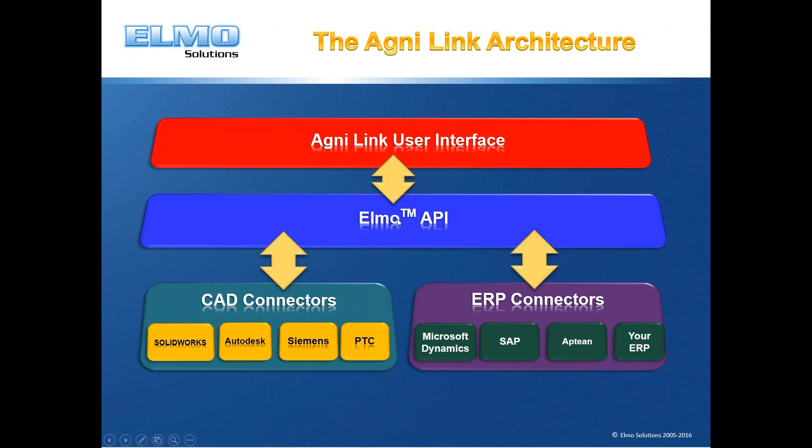So let's see how it works. For the sake of today's presentation, we're going to use SolidWorks as our CAD application and Dynamics NAV as our ERP application.

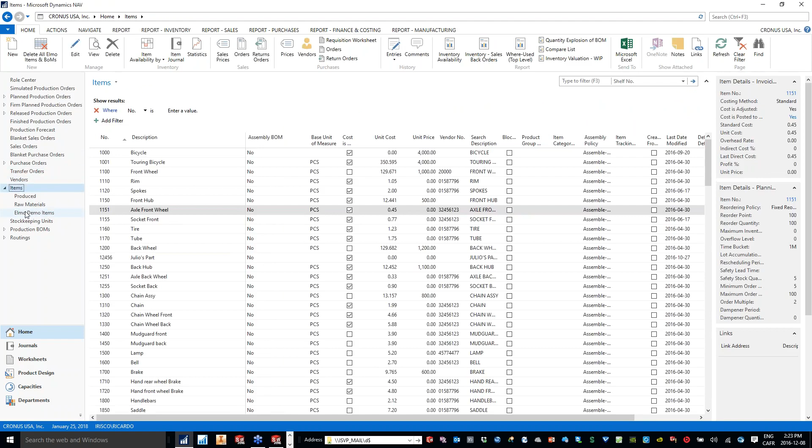Notice that the ERP database here is totally void of any of my own items. This is actually the good old Cronus database for those familiar with NAV. So there are some items in there; however, there are no items that have been created or processed by the integration.

So what we're going to do first and foremost is complete our integration and automatically populate the items in the bills of materials with whatever has been found in the engineering document.

Now, how is the integration triggered? It is triggered basically by different events depending on the CAD, PDM, or PLM application. In the case of a CAD application, it's usually a save operation that will trigger the synchronization.

Now here you have the AgniLink toolbar. Notice that the first two buttons are to activate or deactivate the application. So at any time you can deactivate AgniLink and nothing really will happen from an AgniLink standpoint at save time. Whenever you activate AgniLink, it will trigger processing in the case of a CAD application such as SolidWorks.

It will intercept the save message, and it will do its processing prior to letting the CAD application complete the save process. That allows us to make any changes that have to be done within the CAD documents prior to the save that is done by the CAD application.

The toolbar will also allow me to force a manual save here, but actually it's exactly the same thing as doing a Control-S or a file save in the CAD document. It will also allow me to select synchronization options. That's quite interesting because this will allow you to determine what is going to happen in terms of updating the CAD or the ERP data whenever you trigger the synchronization process.

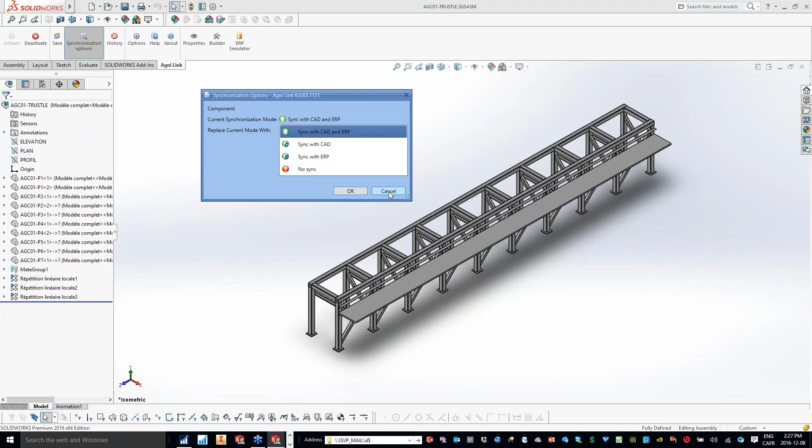You also have an options button here. Clear and simple, the number of options available are quite limited because actually it's a highly automated system. Again, because we do not want to confuse the end user with tons of settings, we try to automate the process as much as possible and keep the options to a minimum.

One of these options will allow you to determine whether or not you want AgniLink to process those thumbnails, those pictures you see when you look at a CAD document in Windows Explorer. This is important because it usually consumes quite a lot of CPU resources on the PC, and you may not necessarily want to use that.

But of course it's a great feature, because what it does basically is extract from each and every BOM item in the engineering document the picture, and then send that picture into the picture field in your ERP system whenever that feature is available. And of course, it is available with applications such as Dynamics NAV and Dynamics AX, among others.

There are some other simple options. One of them, which is very important to your engineering users in the case of SolidWorks, will allow the end users to determine whether those custom properties, which are basically the fields that are mapped to your ERP fields, will be taken from the active document or from what we call the active configuration. This is very important because depending on how your engineering department people work, their metadata for the ERP system will be found in either the active document compartment or the active configuration compartment.

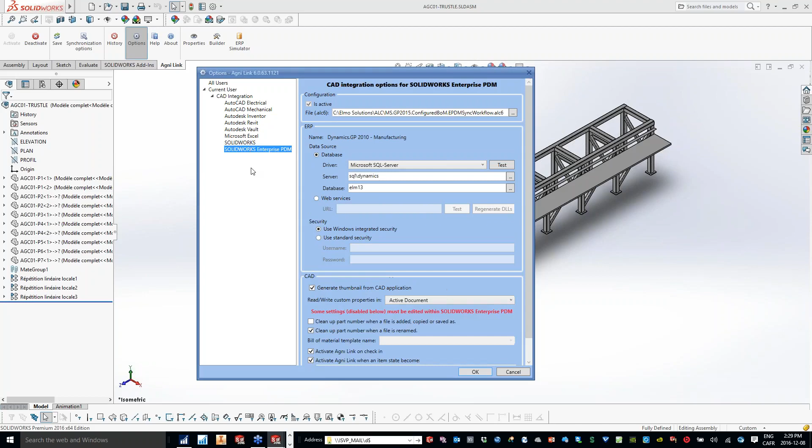Another interesting thing, if you're using a PDM system—by the way, PDM stands for Product Data Management, which is basically a superset of a CAD application—in the case of a PDM system, the end user will be able to select what we call the states or the workflows that change and define the state of a document. Usually they will probably want to trigger the integration when a document approval or release has been done.

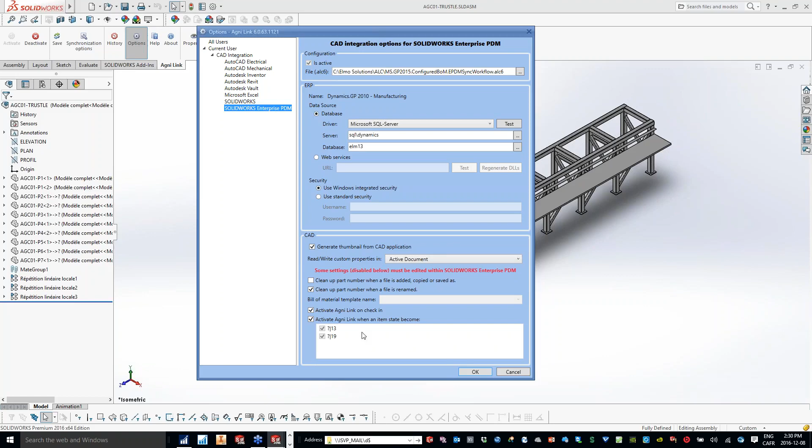However, it is possible to select any of these workflows or states to trigger the integration. Sometimes you will want to do the integration progressively as the system is built. It can be done by merely selecting the proper states and workflows.

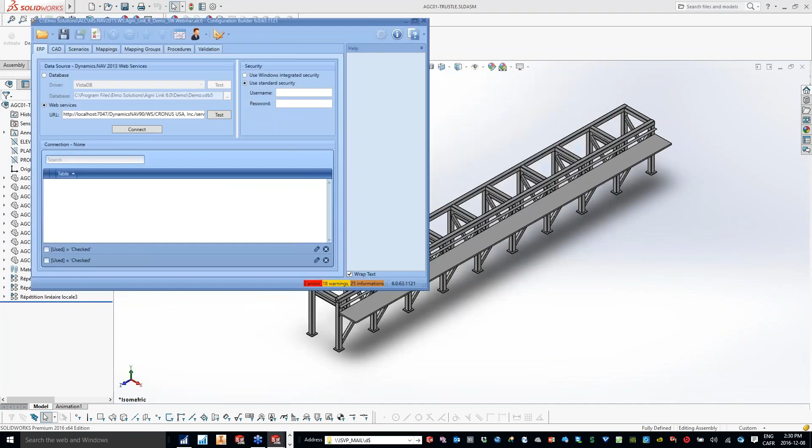Another great feature of the system is what we call the AgniLink configuration builder that I mentioned earlier. It's basically a utility that allows you to define the behavior of the integration by merely modifying a grid of properties here that we call the mappings. Actually, mappings are grouped into what we call scenarios.

The scenario is basically what is going to happen when that specific type of document is processed in the CAD system. So we have a scenario for assemblies, one for parts, one for routings, and we also have a special one for bills of materials. The bill of materials scenario will be triggered automatically whenever an assembly is processed in the CAD system, or a part that has a raw material is processed as well.

AgniLink will automatically make the decision as to how to process a part or an assembly depending on what is found in that document. In the case of an assembly, it will always be treated as both a BOM and an item, if we're talking about a BOM type integration in the ERP system. So an assembly will always be treated as both an item and a BOM.

However, a purchased part will be treated just as an item. In the case of a part that does have a raw material, because we do manage the raw materials as well, AgniLink will treat the part as both an item in the ERP system and also a BOM that would have an only child, which would be the raw material.

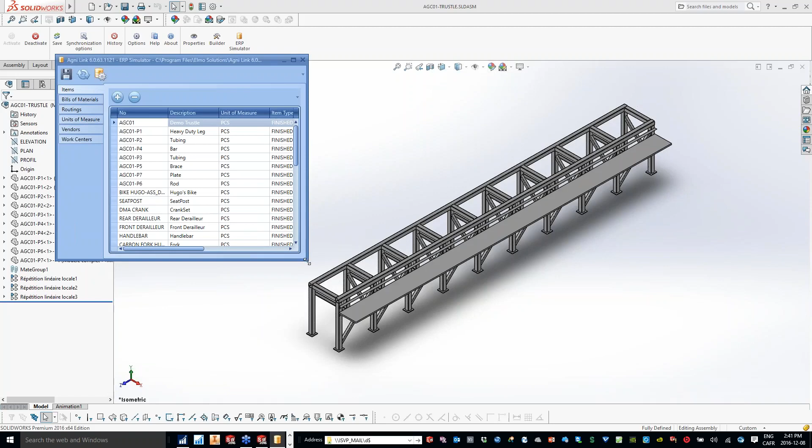Oh, and by the way, we're currently actively seeking beta testers for what we call the ERP simulator. Sometimes potential customers want to evaluate the product without necessarily involving their own ERP system, or perhaps in situations where the ERP system has not been selected yet. So we have just built a trial version of AgniLink that allows the customer to do this. It's basically an ERP simulator that keeps track of the basic data required for bills of materials, items, and so on. So if anyone is interested in participating in the beta testing, we'll be more than happy to work with you on that.

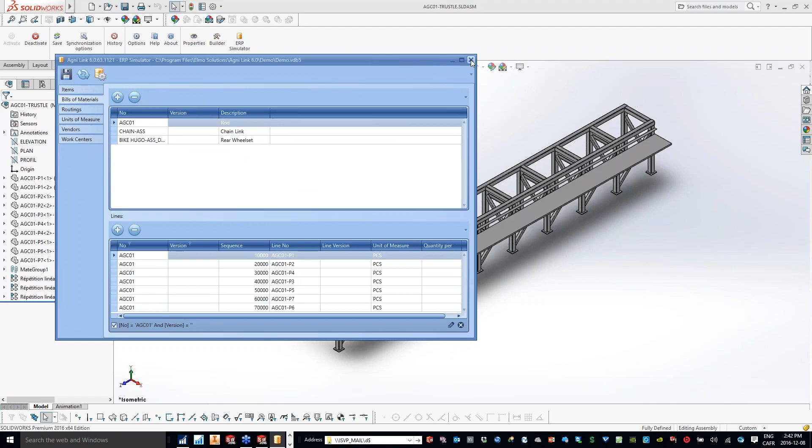That pretty much concludes the control. So why don't we get some action here and launch the integration. As I said, it's merely a matter of saving the CAD document.

Agni Link will get the data from both the CAD documents, the parts and assemblies, and also from the ERP system. In this case, since there's nothing in the ERP system, we're starting blank.

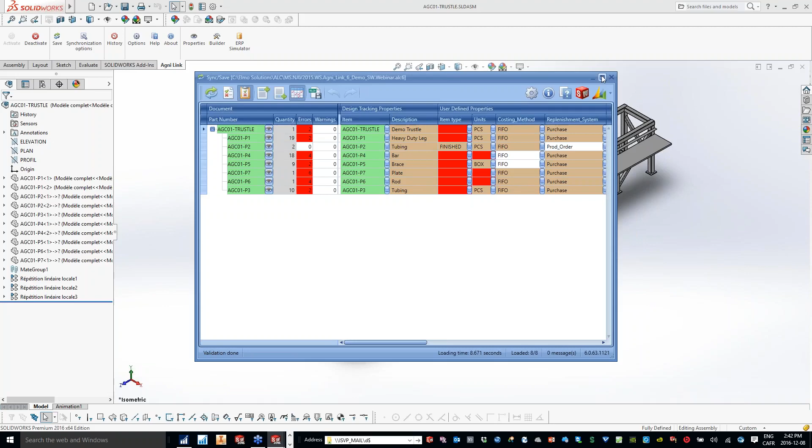Notice that we make extensive use of color coding so that the end user can be immediately made aware of what is going on with the integration. For example, a green line here indicates that product has not been found in the ERP system as a BOM item. When we complete the integration, it will be created automatically.

The item number here is really the key that unites, so to speak, both our systems. The golden rule is you can integrate anything you want between your CAD and ERP system as long as there is one key. Most of the time that's the item number, but it can also be a project number, a job number, or anything, as long as you have a one-to-one relationship between the line in your engineering documents and the matching items in the ERP system.

We have some fields here that are basically lookups, and you can find them easily because they have that button with the 3 dots. For example, the item type here is a lookup. So let's say I want to enter a totally silly item type. Then the cell here, a red cell, indicates an error. The cell will remain red.

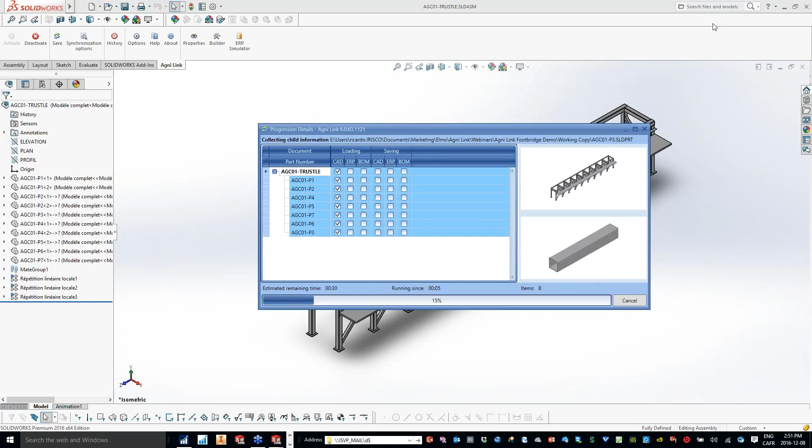A discrepancy will be found, of course, between the CAD description and the ERP description. Agni Link will automatically find it and indicate it by coloring the cell yellow. At any time, the end user has the option of deciding whether this is what he or she really wants, or can simply right-click on the cell and say, I want to revert to the CAD version of the data.

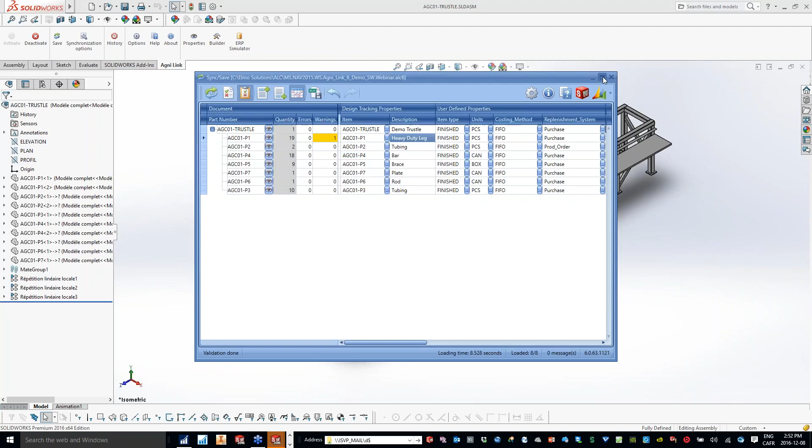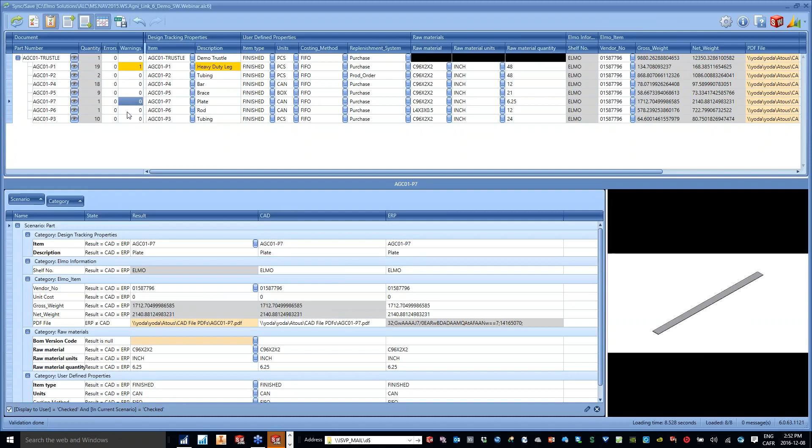At all times, you can see the content of each of these three individual buckets. Another way you can see what you have in your integration, this is a simple view. We have a much more sophisticated view that will show you all of the details relevant to each individual component, including even the picture for that component. Anytime you select a row, the content of the lower pane will change.

There's also much more information than what you can see right now in the dashboard, and most of that is for troubleshooting, fine-tuning, or diagnostic purposes. But there are many more semaphores, like, for example, a field—a checkbox actually—that can be used to exclude a part or an assembly from the ERP BOM.

The reason why you want to do that is sometimes you would model a purchased assembly in your CAD system, and you may not want to have the lower components on the BOM sent to the ERP system. We call that a phantom BOM. So you keep the top-level assembly, and the rest is left out of the bill of materials in the ERP system, and that flag is kept forever in the CAD documents.

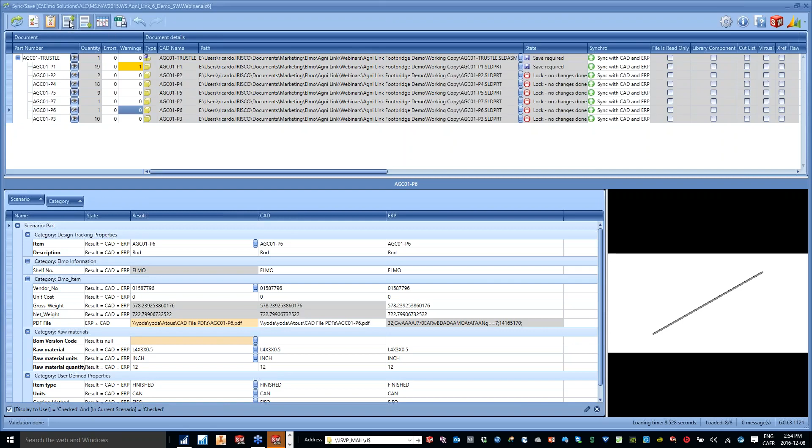So there's a wide range of data, but on a day-to-day basis, this is the simple view you're going to use. My end user has the option of selecting which of the three buckets will be kept, or simply to say, okay, I'm going to change that for a cheap leg, and then complete my integration.

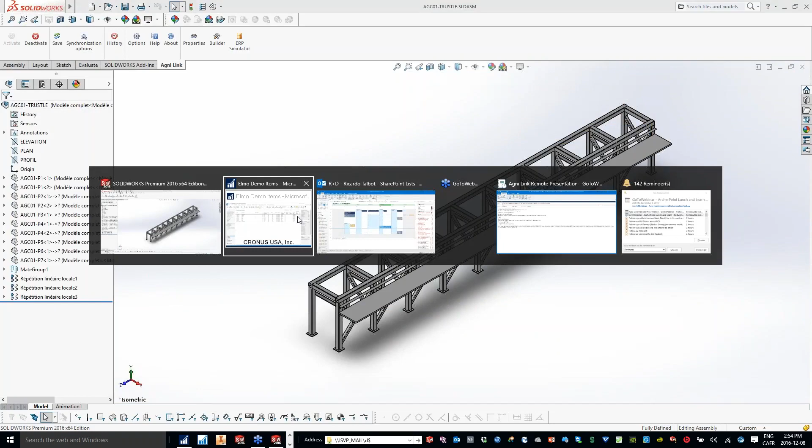Now let's see what happened in my ERP system. Now my description has been changed to cheap leg. So that's how we can bidirectionally bring data back and forth between the CAD and the ERP system with maximum efficiency.

We do have a couple of questions that have come in, Ricardo. Okay, I'm done. Perfect timing. So first of all, is Agni Link compatible with NAV 2009 R2? Yes, actually it's compatible with any version starting with 4.0. That's what I thought, just wanted to verify that.

Another question that came in is how well does it work if AutoCAD is on a local machine but NAV is hosted? That's not a problem because all of the communication with Dynamics NAV is done through web services, so it's cloud ready. It's been cloud ready even before there was such a thing as a cloud version of NAV. So that's not a problem. We have customers who work with either on-premise or cloud environments.

All right, great. Thank you for the questions. Let's see what else we have here. Well, we have a couple minutes left. When's the best time to implement CAD and ERP integration? ASAP.